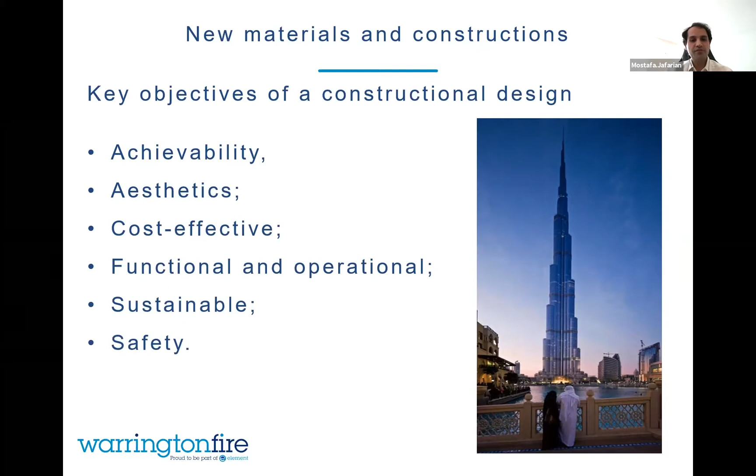And the design should also be cost effective and within the budget, making sure that whatever design we are going to put in place meets the functional and operational requirements, as well as making sure that it is sustainable in design. But the overarching matter, which within any project and any subject you have to be mindful of, is safety. Specifically in this case, we are going to talk about fire safety.

The parameters which will affect those objectives from the construction would be defined when we are choosing our materials for the construction. And when we define those materials, that could modify and affect the method of construction we are going to use. As Abhishek mentioned, we currently have specific test standards, which are very prescriptive. But when it comes to the guidelines and the fire safety codes, the authorities, to help us in terms of choosing different types of materials, have been giving us the principles of the fire safety codes and the requirements that we need. So we would get away from designing all of the time a series of boxes and not having anything new in front of us.

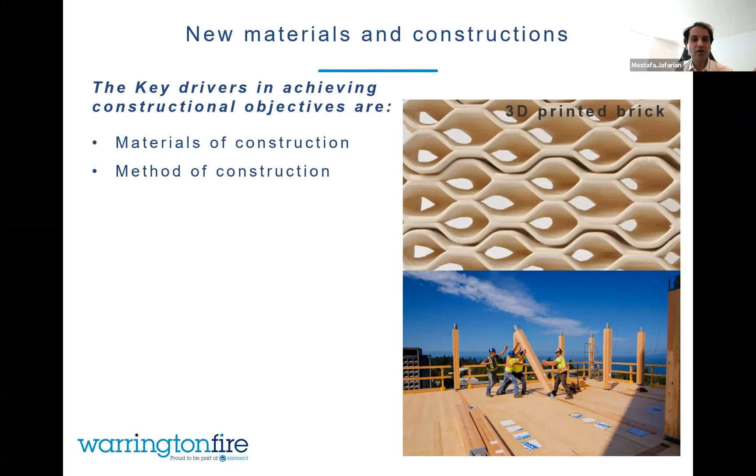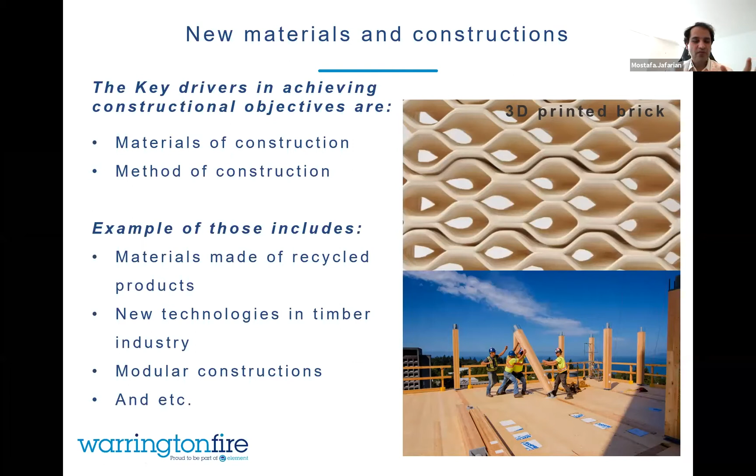As such, these days our designers have a range of products in front of them, and because of having those products and innovation, they can come up with new types of design and materials, including the chance of using products made of recycled products. We are seeing new types of technologies for timber structures, which leads to more and more high-rise timber construction around the world. We are having new methods of construction, which include modular construction and many more. And among those, today I want to briefly talk about modular constructions and see what they are and how they relate to the fire safety aspect.

Well, just before we get too much into fire safety, I think it would make sense to define modular construction. Modular construction refers to types of systems which are manufactured off the construction site. And when the end product is finished, they are transferred on site and installed on a specific type of foundation which is already in place, or they are used as part of a hybrid system.

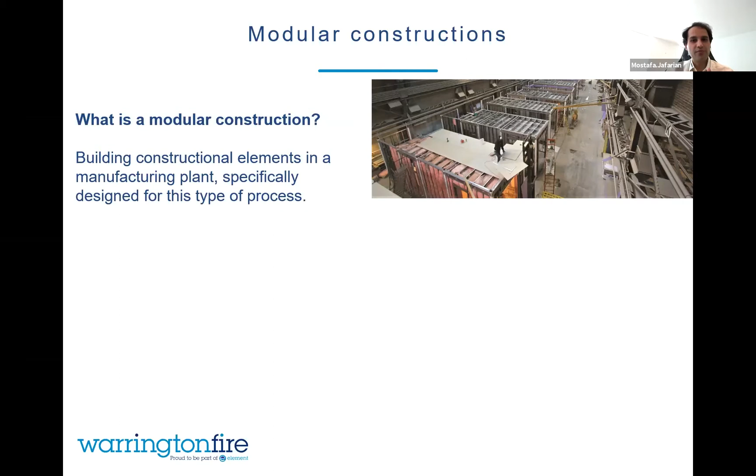These types of products and construction methods can be used for literally any type of building that we can build with conventional construction, including residential buildings and high-rise construction.

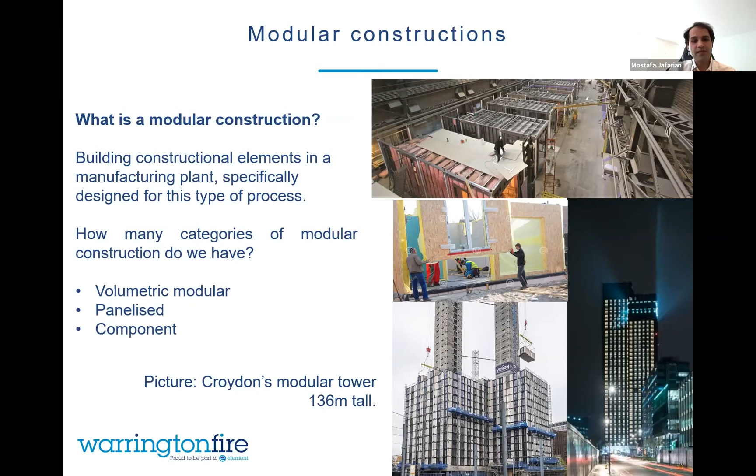And an example of it, you can see it here. That's a 136-meter tall building in Croydon that was built using modular construction on a hybrid system. But the question would be why these modular constructions became more and more popular these days.

One, as I said, it is because those products are made and manufactured off-site in a manufacturing site, which allows them to have a high level of control over the product and the end-use product. That means that they are going to reduce the volume of waste throughout this construction process. And because the product which is going to get on site is actually ready, that would dramatically reduce the construction time.

And having the reduction in the waste and reducing the construction time, this would make this solution very sustainable and very appealing for the developers. And in terms of the overall cost for the labor, again, because of the lower construction time and because the product is ready, that would be reduced as well. And they can be used in the form of hybrid as well as on their own. For instance, for high-rise construction, they can go in a hybrid format. And if they are going to be just temporary buildings, they can be used on their own.

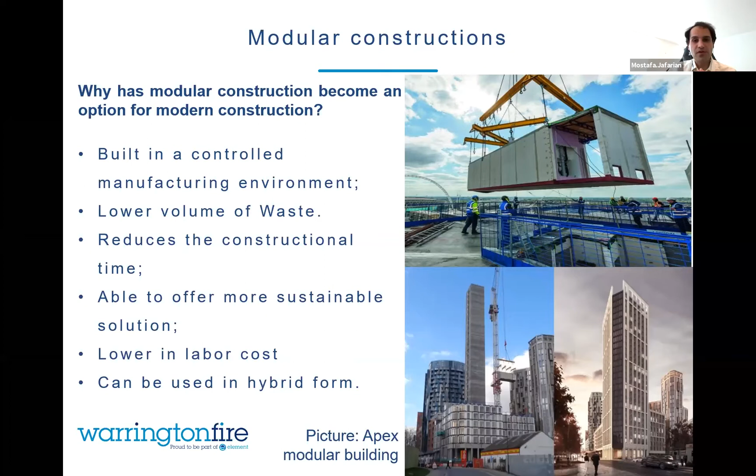But as has been mentioned, these types of products are quite new, and a little bit different to the traditional type of construction that we have. That means that we currently don't have a specific code for modular constructions that could address all the concerns of moving away from traditional construction. And that means that we want to address a couple of challenges when we are dealing with modular construction.

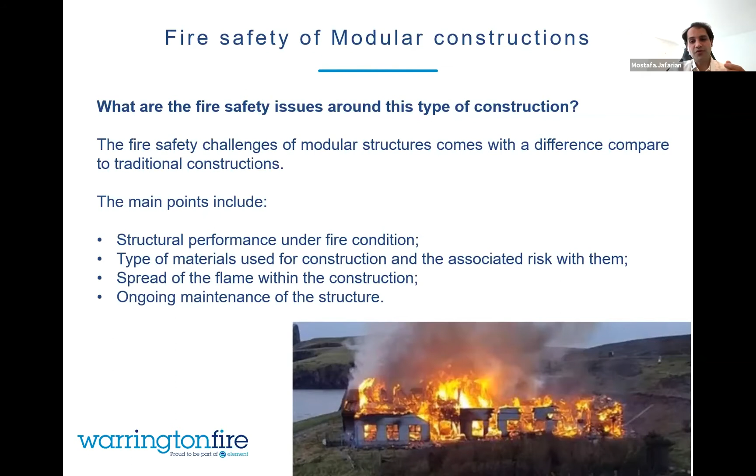That includes the fact that we have to answer whether the structural performance in the fire condition can be controlled, or can we check it, and the answer for that one would be yes. We would ask questions about what products we are using as a part of these constructions to make sure about the risk profile that we are dealing with, how the fire is actually going to spread in these types of construction, and how we are going to deal with ongoing maintenance of these structures.

Well, to make sure about the safety of the constructions, and because we might not have very specific codes related to modular constructions in place, we have to always go back to first principles, start asking ourselves very basic questions and build our knowledge on that basis. That includes: can the material that we are going to use as a part of these constructions be easily ignited? Do we have the heat release rate of the products? Can we predict how quickly the fire is going to spread on the surface? How can the smoke propagate throughout these constructions, because there would be cavities between the systems? How can the flame actually spread between those elements of construction?

The other bit is: do we need to protect the structural elements? Do we need any separate type of fire protection for structural elements? What would be the load carrying mechanism in the system? Can any part of those modules melt and create droplets? At that point, it means that the fire, in addition to a normal spread, can have a downward spread as well, which is a high level of risk.

To answer all these questions, as I said, we are going to go back to the very basics. And this is the curve of how the fire is going to develop inside the compartment. And we have to understand, when we're asking those questions, which part of this curve we are talking about. Is it before flashover, which is that point 7 on the curve, in the middle of the curve? If the answer is yes, we want to deal with answering the questions before the flashover.

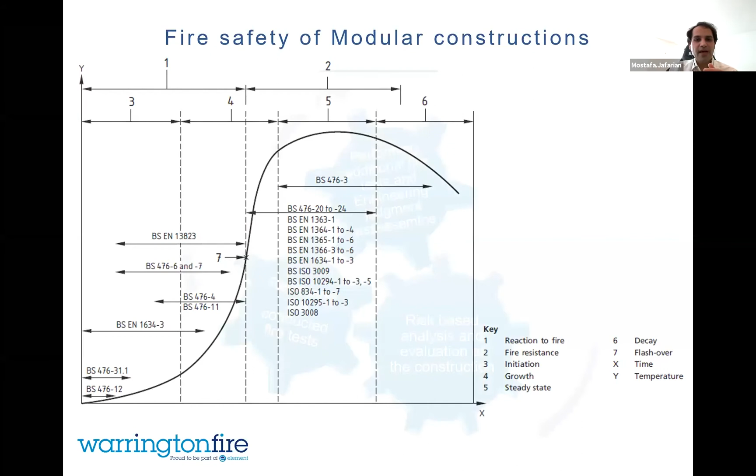That means that we have to ask the manufacturers for reaction to fire test evidence for those parts of the question that we ask. And if it is beyond point 7, beyond flashover, then we are going to ask to see the fire test evidence on the fire resistance side. But as has been mentioned, we already have conventional and prescriptive test methods in place for specific types of products that might not be 100% readily available for modular construction and the scenario that we are dealing with in actual life and actual projects.

That means that for these types of projects, we may need to be very risk-based. We may take a risk-based approach when we are dealing with those types of construction. That means that we would have a risk-based analysis approach, evaluate the construction, and evaluate the risks that we are going to deal with.

When we know all of those parameters and basically spot what are the points that could potentially lead to a risk or need further consideration, then we would go back to the fire test evidence that we've already requested and go through that evidence. If those conventional fire test evidence could help us address all those questions, then we are in very good shape.

But mainly for this type of construction, not always all the fire test evidence may address all the questions. That means for a specific type of questions, which are very much project-based, we can go through conducting a series of ad hoc testing, which is not exactly as it would be done in a normal situation, but it would basically reflect what we are going to have on site.

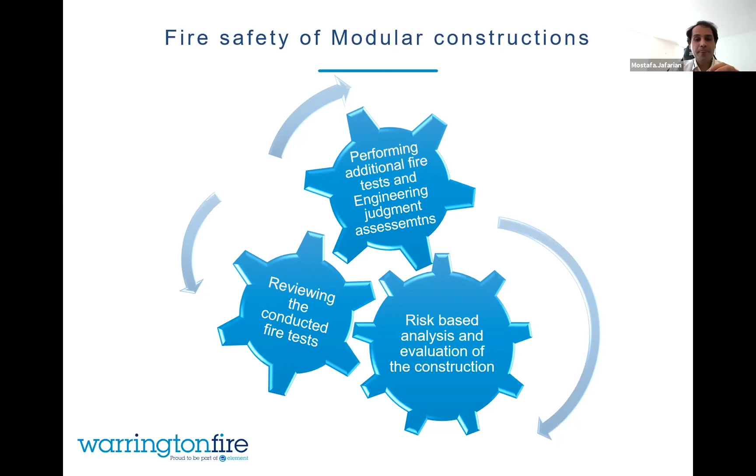The other part of the work we are dealing with for the constructions, in addition to making sure we are all good and have answered all the questions around the construction side at the design stage, the next stage for us, same as any conventional type of construction, is the execution part.

Although the quality of the modular constructions is very high and they can have certification for their product, which most manufacturers will have, when they are getting transferred on site we have to make sure that what is going to be installed on site is actually suitable, and that it could be installed in a way that it performs as intended.

Beyond that, we have to avoid any poor workmanship in place. We have to make sure we are using site inspectors to go on site and make sure that what is being installed is actually according to the plan and has been agreed according to the manufacturer's advice - using certified product, using certified installers, and doing the site inspection.

I think this is something which is going on at the moment and it's been advocated by literally most of these codes that we have. This is a brief quotation from Approved Document B, which basically requests that the end use product being installed on site or purchased for end use be certified, then use accredited installers, followed up by site inspection.

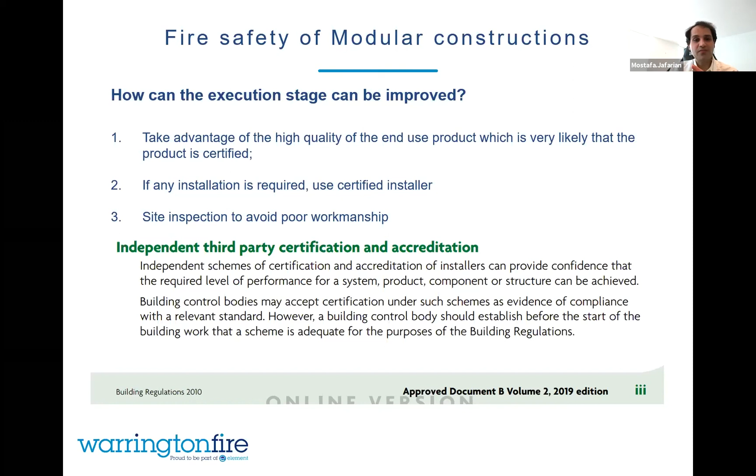So how can we deal with this matter? To summarize my talk now: having new types of products in place is always a good chance, and we have to see it as an opportunity. But having something new should also come with a little bit of vigilance, making sure we are considering all aspects of it, from making sure that the product we are buying is actually certificated.

So you would make sure about the quality of the product. And when we want to use it on an actual site for our project, then we need to make sure that we have sufficient fire test evidence with us.

If there are some bits which are mostly relevant to the product we are buying, and because they are very new they may not sit within the current type of fire test evidence we have, or within the scope of the test standard we currently have, then there is always the chance of conducting a series of ad hoc tests to add more information and compile it together to make sure about the fire safety of the product we are going to have in place.

And finally, just giving all that evidence to our consultants, to make sure they actually have the whole picture laid out in front of them, so they can make an informed decision about how we can deal with these different fire safety aspects that we have in place.

And to close this circle, we need to ask ourselves: okay, we've already done everything at the design stage, let's go back and make sure we understand who is the certified installer who is going to bring those products on site. At the design execution stage, we would use certified installers and then follow that up with a site inspection to ensure the end use product is going to do what is intended and is actually fit for purpose.